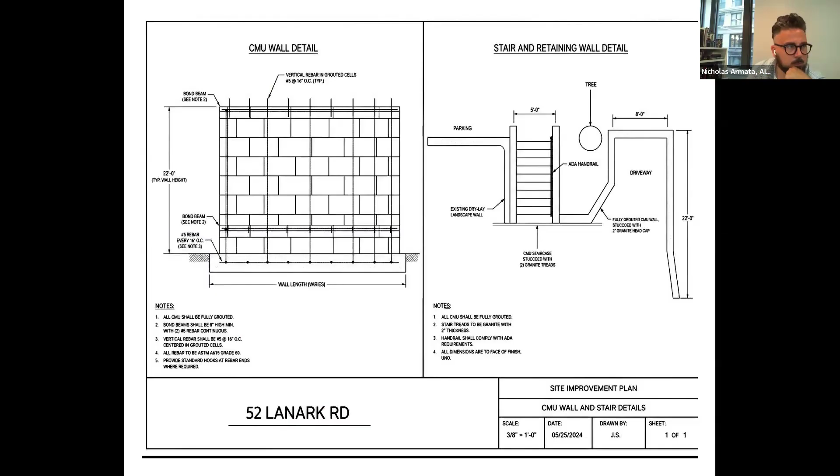Yeah, so there is a brick and CMU retaining wall on the property, and also a set of brick stairs that are failing. The bricks are starting to pull away from the CMU wall, and it looks like there's been a lot of water that's gotten behind it, and it's all kind of falling down. The staircase itself is really starting to kind of settle. I believe the property manager of this property reached out to me, and they simply just kind of want to fully remove the brick and the CMU block behind it, and rebuild that same structure with the same footprint, with new CMU block with the proper drainage behind it. This wall has no weep holes.

So when water gets behind this retaining wall, it's probably getting trapped, getting into the CMU behind the brick, and pushing everything away. So we want to put new drainage behind it, fully redo the stairs, just because they're starting to settle and shift away. They want to try to keep the repair as cost effective as possible, so kind of just reconstruct that CMU block wall, which is going to have steel reinforcement, rebar. The wall is going to be fully grouted, with ties going back into the banking. And it's going to be stuccoed with a granite cap.

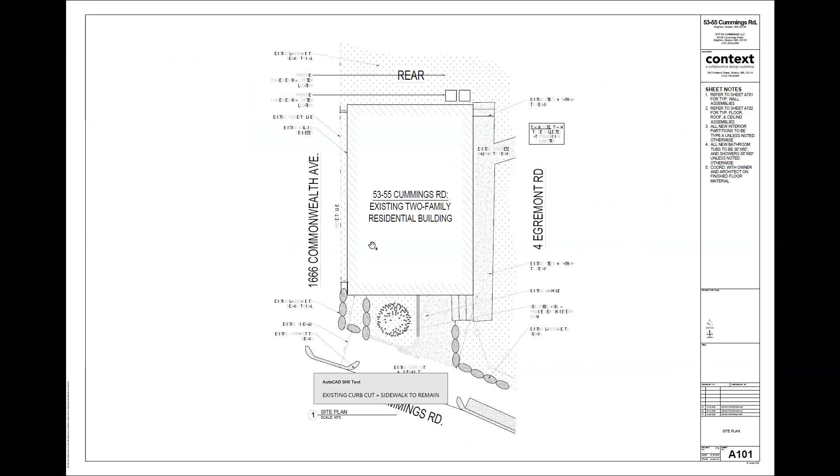Next slide. Also, I should mention the actual entrance to this, you can see it in the upper right here. That's existing, that's always been that way. I believe the way it used to work is that there was a garage door, the front one was a garage door, and the one behind was to sleeping quarters up above. That existing stair looks like it's probably been there since the building was built.

And so now on the first floor, you've got a single 1-bedroom apartment, and then above that, on the second floor, you have 2 beds and 2 baths, and on the top floor you have a living, kitchen, dining with a 3rd bed and a full bath. Next slide.

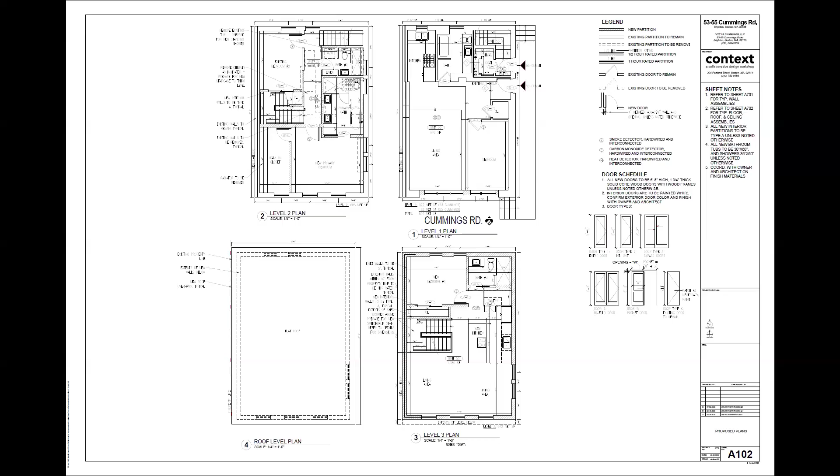So the intent here is that the top floor is going to be lap siding effectively, cement fiber or Acre product - I believe it is the Acre product.

And then the windows would be set on the third floor to match or align with the windows on the second floor, both in the rear where we have existing windows, upper left, lower right where we have the entrance door, and on the lower left you see the elevation that is just 15 inches away from the existing neighbor.

There was a window there, and there was some question about that in the last meeting. The reality is, because it's 15 inches away, we could technically be grandfathered in to leave the existing window, but we think it's safer to put in the appropriate 1 hour wall that you'd have to do with new construction. So we're proposing filling that in, and the exterior expression will be the same lap siding that's on the top building.

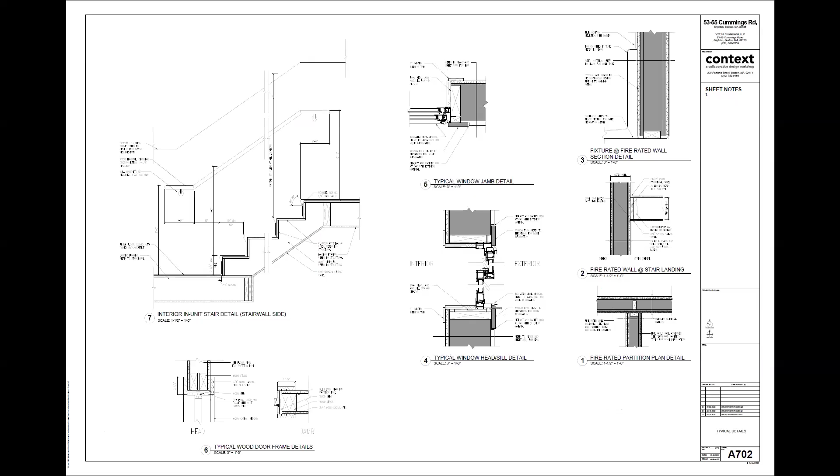I believe there are probably some questions, some things I'm familiar with but I'm kind of stepping past. You can see the existing elevations are at the back of this set as well, in case you want to compare. But I'll open it up for questions and comments.

Let me just chime in here to refresh the commission what they asked for. Commissioners, you had asked last time to change the windows from one solid pane of window to 1/1s. You had requested the addition at the top level be set back on all sides slightly to give some dimension, which Eric has done.

You also had asked for some landscaping in the front, and then to see a sample of the product, which I have here. And I have reviewed it, and I think it's a good, suitable material for an addition onto a historic building.

Being loosely put, but I think then we asked for some changes to happen at the garage, the former garage door area, for these glass windows to fill the space a little bit more. Eric, can you talk about the other changes you made to this door? We talked about this during the desk review.

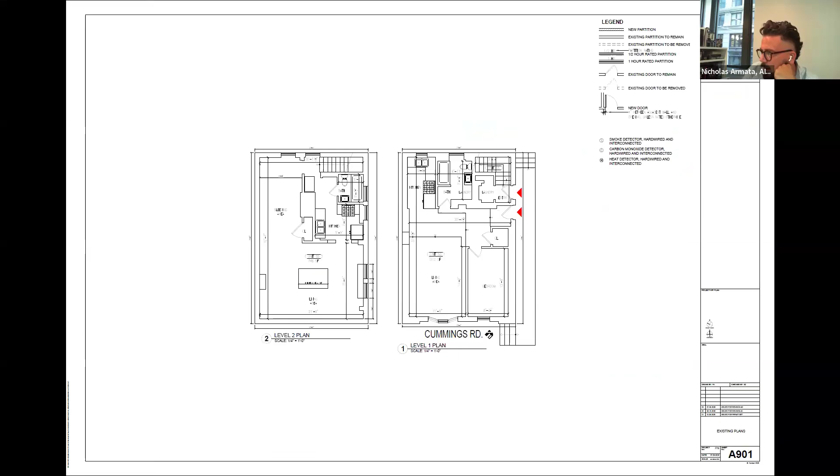Let me just go back - if you could just talk about the changes there so the commission can understand what has changed. I was afraid you were going to test my memory on this because we've gone through so many different iterations. Basically, we had a number of windows - I don't remember what the pattern was, but the request was to make it feel even more like a garage door, so we enlarged the glazing surfaces.

I'm not sure if we redid the pattern to get to this 9 grid and 6 grid on left and right. We have aligned the infill panels, which you see here in a darker gray color, with the joints of the windows. All of that in order to try and make this feel more like the obvious garage door opening that it once was.

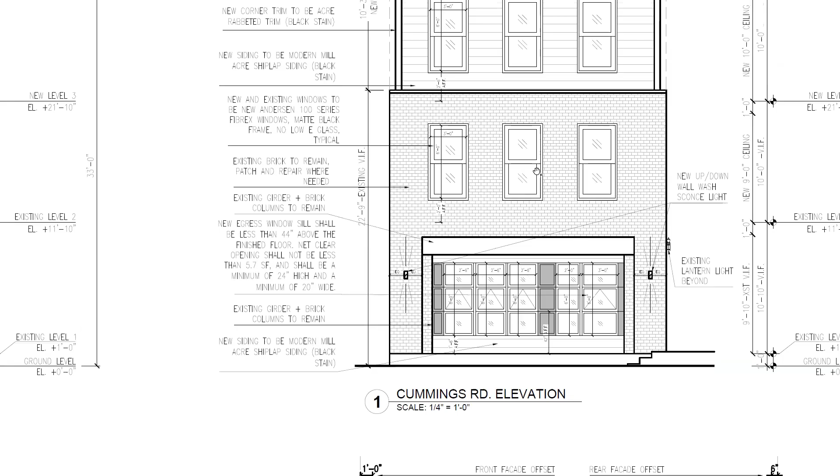The row you see down the middle is operable because this is a living room and a bedroom on the other side of it. And then the other thing you had asked the applicant was to go from a vertical seam on the upper level to a horizontal seam, which he has done, and I think it actually looks really lovely. The other thing that was added are the lights at the front to give it a little bit more depth.

And then in terms of the landscaping in front - Eric, what's the vegetation you're adding here on the front? Do you remember the name of it? Looks like a chokeberry. Yes, good. Great, and I think that was it.

So commissioners, we'll hold it and pass it over to you. If you have any questions, just let Eric know.

Okay, let me begin by saying I think all of the modifications we requested last meeting have been implemented very well, and I do like the end result. Going to turn it over to the rest of the commissioners, but I think we've been pretty thorough on this one so far. Ed, Helen?

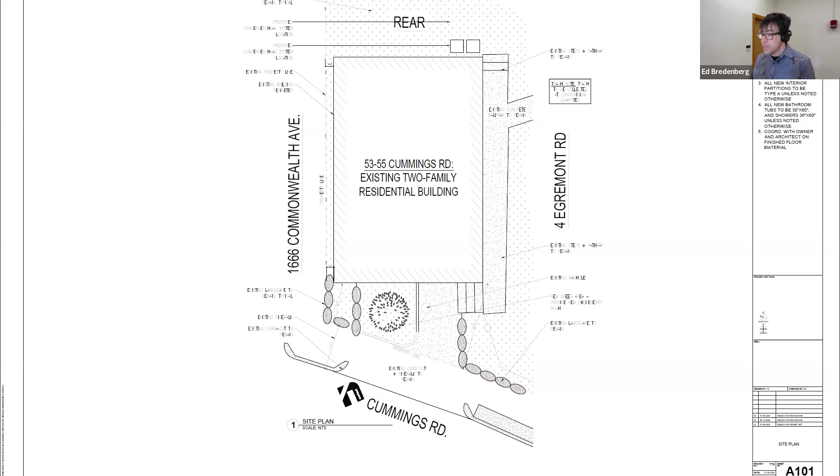Yeah, I agree. All the changes that we had asked for seem to be implemented. Okay, Kirsten, do you have anything to add?

If everyone has, Sharon, I just want to make one comment. I agree with the others that the proponent has followed all of our guidance and done a nice job.

In implementing those ideas, I just want to suggest to the commissioners that if we accept this new material for the third floor, that we are clear in specifying that it's an addition to a historic structure, not even restoring an existing part of the building. It's a new part of the building that we are permitting this new material to be used, because I don't want to be in conflict with other decisions we made.

I still stand by our decision on 19 to 21 Orkney, the Hardie board to clapboard, 19 Orkney address, where we required the natural clapboard material, and that was a full restoration of a historic house. So that's the distinguishing factor to me, that if we do find this appropriate, that is the reason it would be acceptable to use this new material.

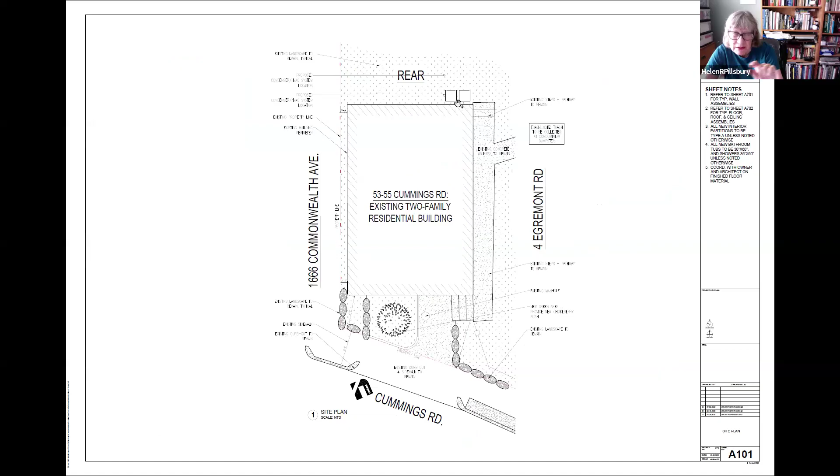And the cap that we're going to introduce, is that sort of like a cap along the top? And what material is that? Painted metal. Okay, that's nice. Thank you.

If we're all ready to go, I'd like to open it up to the public. Could I just ask one question about the cap? Sure. The cap looks like it's wider than the addition, but it's still narrower than the original footprint? Yeah, it's a few inches wider than the third floor, which would make it a few inches narrower than the second floor. Perfect, thank you.

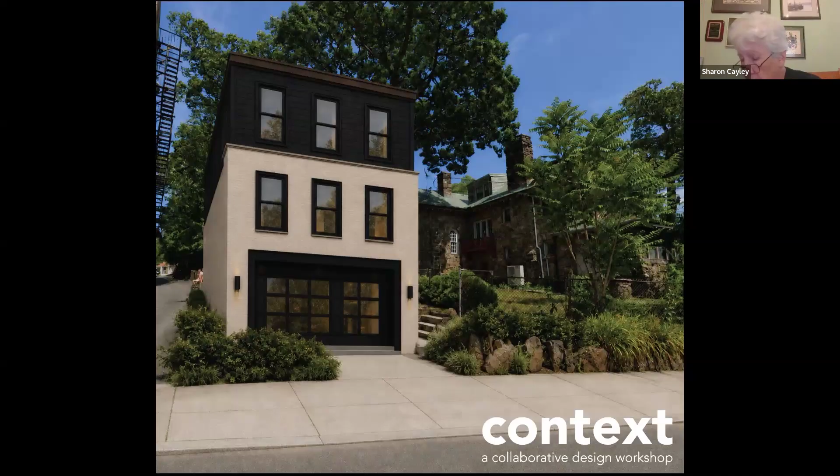So I'll entertain a nomination. I'd like to put forward a motion to approve it as submitted, with the construction material and construction plan submitted to staff. I'll second it. All in favor? Aye. Aye. All right, perfect, that is approved. Thank you very much.

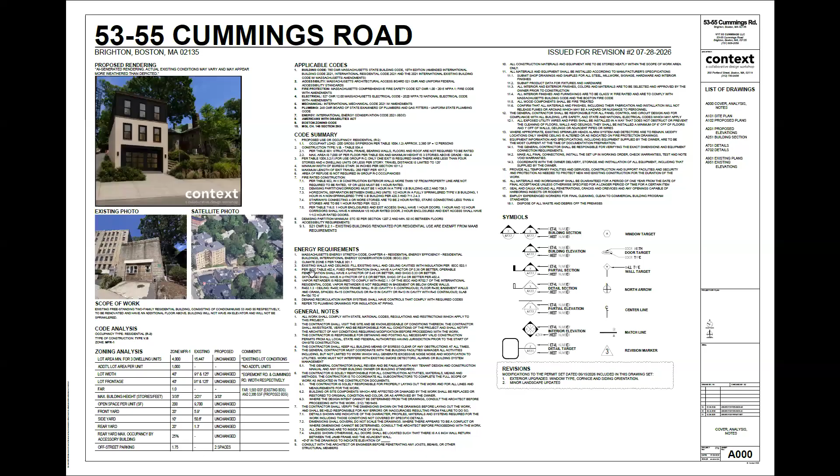Are we ready to move on to application 27.0092? That's 1954 Commonwealth Avenue. This is a design review.

Is there anything that we haven't seen already? Sharon, we're going to allow the applicant to present. Okay, so we have Mark and Susan. For whatever reason, Susan's on my computer with me. We're right here, perfect. Mark, do you want control of the presentation, or do you want me to flip through for you? I'll do it if you don't mind. Sure, let me just make you co-host.

Why don't I see the... is this? That's a preview though. I'm gonna just go through quickly the slides that were presented, and then we can look at the 3D too. I'm gonna have Susan start with the landscape first.

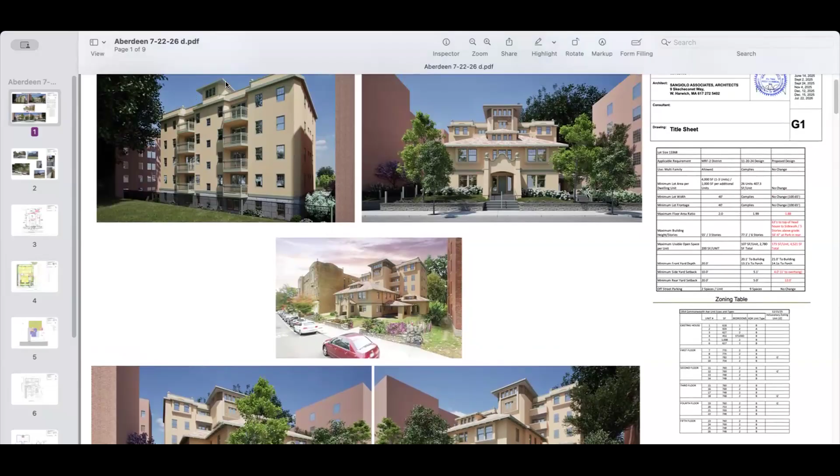As for the architecture, I think we had a fairly extensive review last time when we modified things, and everyone was pretty happy. We made some modifications during the meeting, including pushing the tower back, putting a nice roof on the tower, flattening the roof at the rear, and doing the balconies solid. Some of the things we organized since the last meeting, the comments we organized - I'm going to go to the 3D, I think that'll help better.

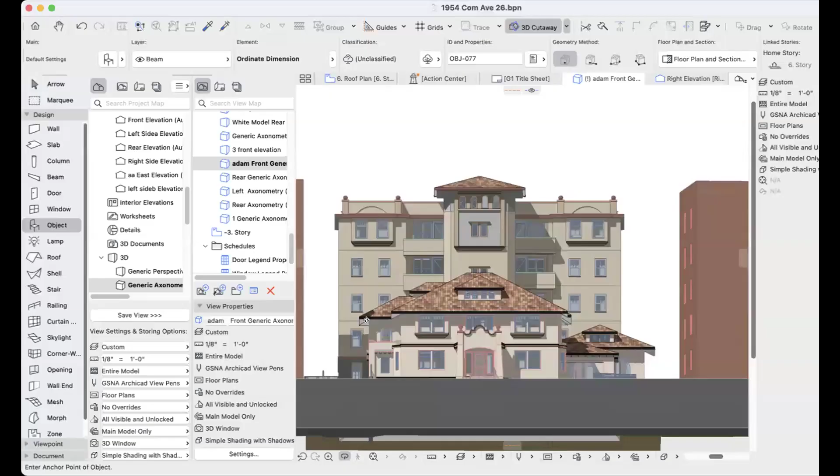So everyone can see this now. We organized the windows and doors to the balconies, so they're a little more uniform.

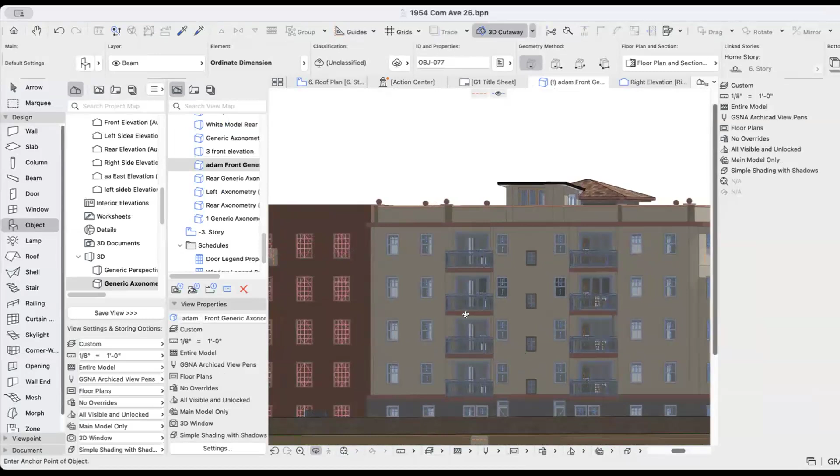One thing I'm going to push back on a bit - I'm willing to do the flat corners on the front of the building, and perhaps the solid railings, but on the rear I really want to do the chamfered corners. It's sandwiched between these two brick buildings, and there's an implied force on any structure you build, and this has kind of an implication being between these two buildings. I think it'll create a nice positive effect. In any architecture you want some delight - you don't want everything monotone. This solves that problem and adds a little delight.

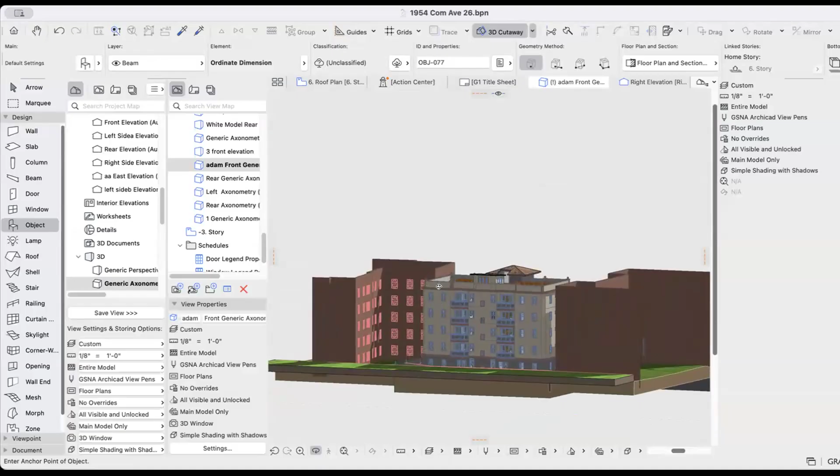On top of the roof, I'd like to keep the balls. I think they add something to the building and create a nice little delight, and it matches the two balls on the front of the existing house. Those are really the only changes we've made.

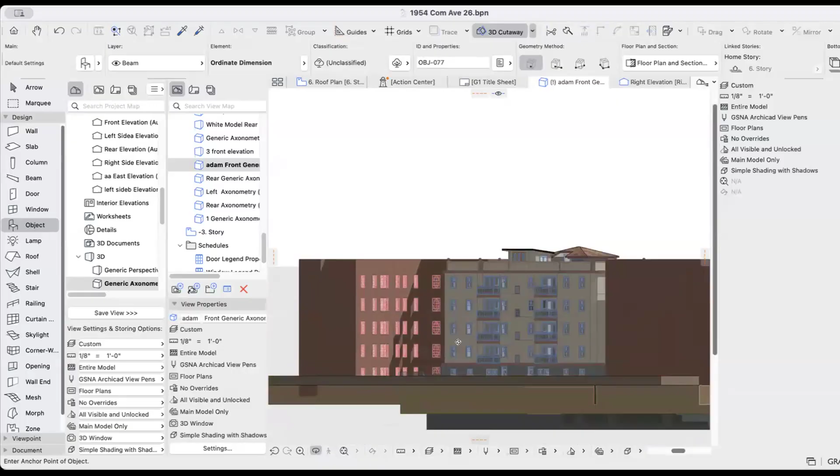Also, I don't want to do the solid rails on the rear - I want metal rails. This building is going to be a condominium, so it's not going to be a case of apartments with people trashing their balconies. People are more inclined to take care when it's owner-occupied. The metal is a mission style railing - many mission style buildings had metal rails, and since it's owner occupied, people will take care of their balconies.

Getting into the color of the building, I'm going to go back to the other presentation. We want to do the two - I know you're not regulating color, but what we're thinking is red tile roofs, some red tile on the face of the tower, cream colored stucco, and a historic green color for the metalwork - the windows, the fascia on the overhangs, and the railings. That's basically it.

Mark, will you talk about the color of the proposed building compared to the existing building? Is there going to be a gradient change or difference? No, they'll both be the same color, same color scheme.

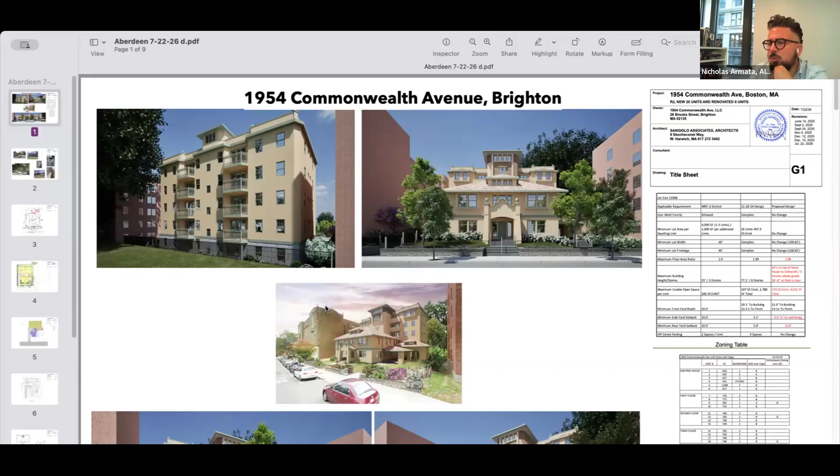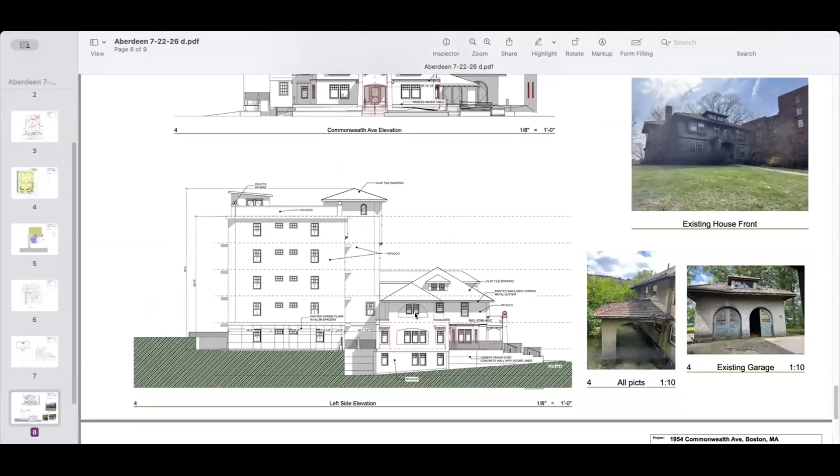Mark, explain to the commissioners where the HVAC is, just to refresh your memory. Sure. Most of the HVAC is on the roof of the addition, behind the parapet. Also on the roof there are some green areas that are accessible. And then there's a couple of spots not visible from the street where we're hiding the HVAC for the existing house. Let me see if I can find it.

One is behind this area - there's like a little deck courtyard back here, one's there. One's behind the porte cochere. And that's about it really - they're hidden from view. Good.

One last thing, Mark, and then I'll let the commission discuss this. The doors to the garage - it was a little unclear in your submittal whether they're being kept, or if it was a rendering error. Can you explain that to the commission?

Yeah, the doors to the garage, we're going to rebuild in kind to the same geometry that they are - they're not in great shape. Okay, it was unclear, so we just wanted clarification.

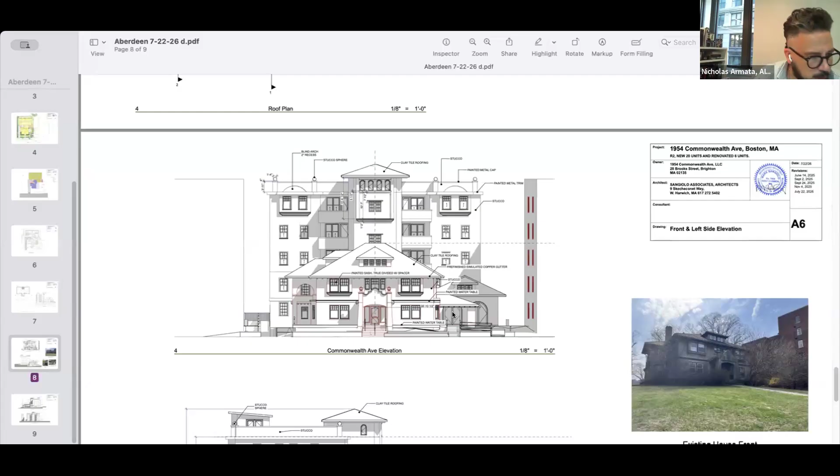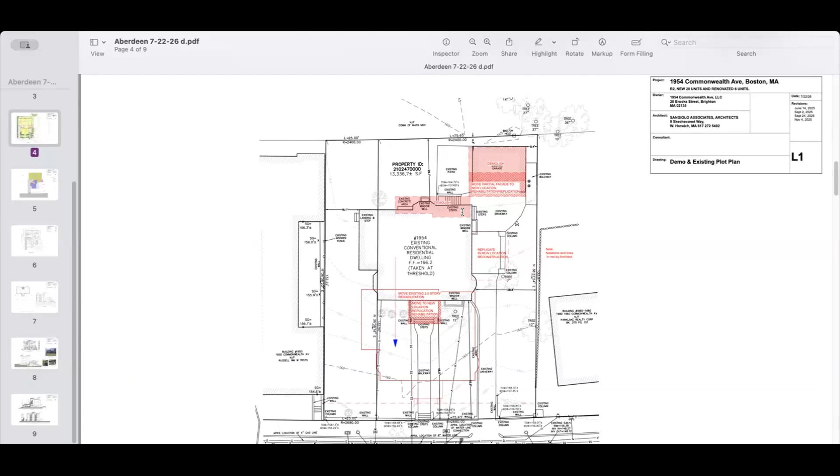Mark, are you proposing to demolish the chimney on the existing structure? Yes, we are. The back portion of the building here we're going to demolish, and I think part of that is the chimney. There's kind of a lot going on back there - there's a bay and a balcony, and we really can't incorporate it into the design. We have to have a clean surface to tie into.

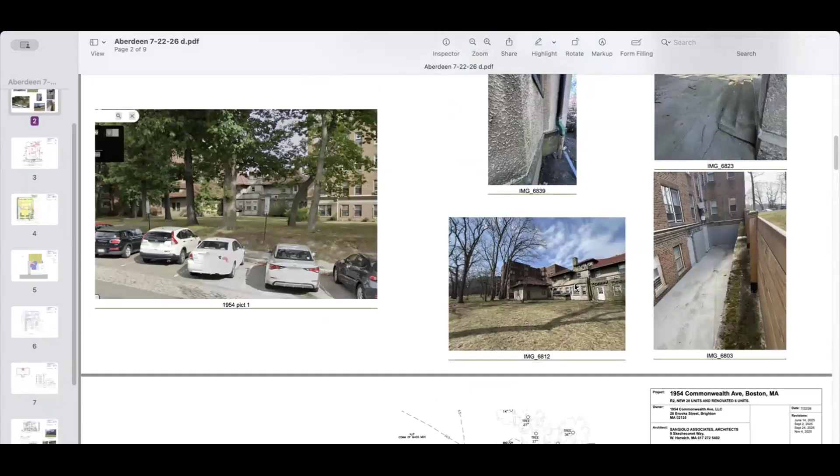And that was allowed in the special permit and approval given earlier. The original design for the addition? Yes, the removal of that wall and the chimney were both approved. Here's the rear of the building - it's virtually impossible to connect to this, there's so much going on, and it would be hidden anyway. The new building would be completely obscuring it.

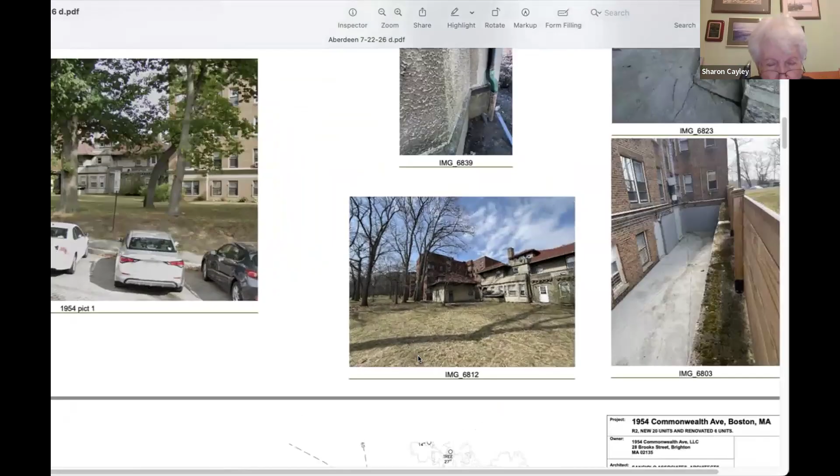We focus on chimneys because we had an issue on the other side of Comm Ave with a very distinctive chimney that had a crown effect on it. Can you blow up that image, number 6812? It almost seems like a utility chimney. Yeah, it does look like it doesn't have any distinctive features. All right, thank you, that answers my question.

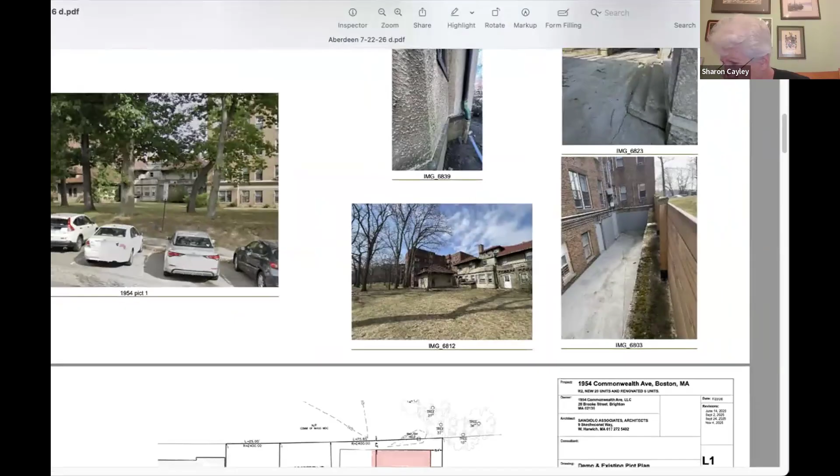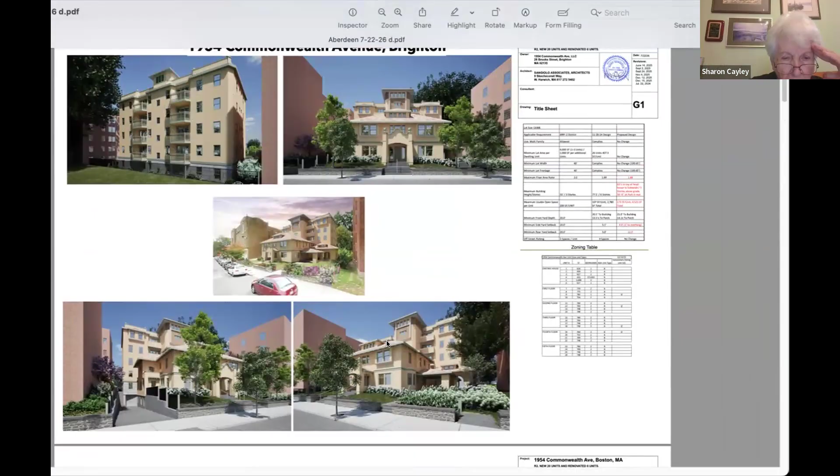I did have one question, and I know it's come up before. I know that the handicap ramp has to be there and the space is constrained, but is there any way to stretch it or make it less of a 3 or 4 right angles? Or is this the best that can be done with the space allowed?

What we tried to do was, this will be the main entrance for the new tower, so we wanted to coordinate that handicap accessibility with the main walkway that gets you to the back. The only way we could really do it is to do these ramps between the planting beds. Otherwise, we wouldn't really be able to have the walkway with the steps that most people will be using.

Yeah, all right, thank you. And I did check with our architectural access board on this. It is the preference of the board to have the ADA compliant entrance be the same as the main entrance. Okay, I was comparing it to other ramps that I've seen, and I know that the pitch is critically important, but okay.

Are we ready to move on, is that the end of the presentation? Yes, I think so. Could I ask for just a clarification on the ramp? So the reason why the ramp is there is because you wanted to also have the stairs. So is it a matter of you may have the ramp or you could have the stairs and you wanted to have the stairs, or?

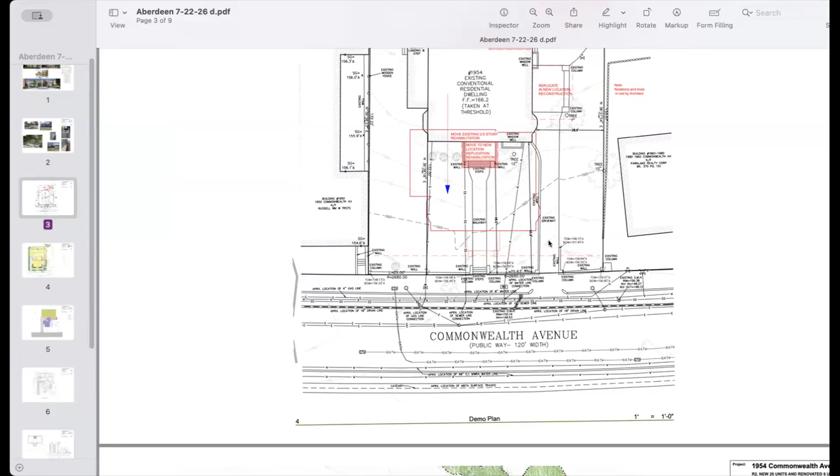So it was 10% back to, that's not even, you don't even show where the garage is. The garage is further back. Right, so for accessibility, it's pretty steep.

Commissioners, for what it's worth, I think that's adequate. I think it sounds like it's erring on the side of caution and keeping our folks with mobility issues in mind. It's probably right there on that cusp of the 8% grade, so it's probably something that just needs to happen. It doesn't look the best, but if it means people with disabilities can get into the property, then that's worth it. And landscaping helps a great deal.

I would just like to suggest that in the landscaping plan, the shrubbery there be something that would retain some greenery. Yes, actually all three of those planting beds, I believe one's an azalea, they are evergreen, and they stay at a height under 4 feet. Right, and they also don't want to be too tall. That's right, retain greenery but not too much height.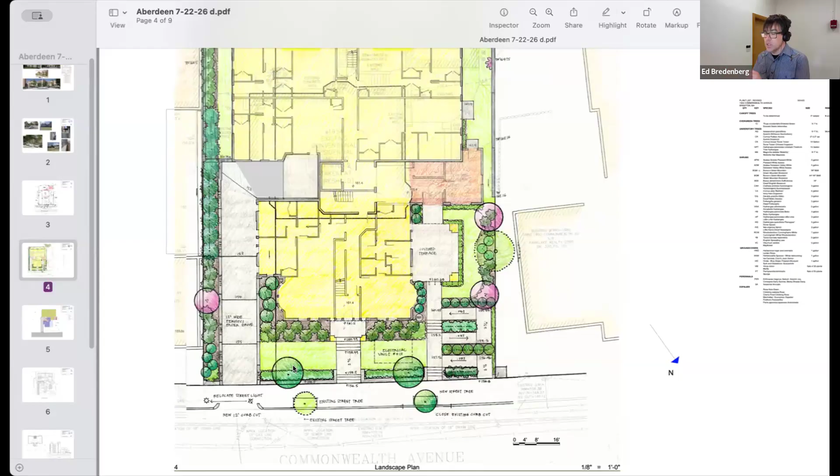Thank you. And we'll be able to keep as much of the stone wall in front as possible? We will, we're still, if you look at what's proposed for the utilities, there's a lot of utilities and vaults that have gone in there. So we will do our best to try and keep it. If we can't keep it, we will be very diligent with our specifications to try and match what's there. But we'll do our best.

The rendering that I saw on the portal sort of showed some other kind of stone. It didn't look like it was retaining the existing wall. I think that's an important feature of the property, that's important to retain, the round stone. Rebuild it if necessary, but retain those stones and retain that wall.

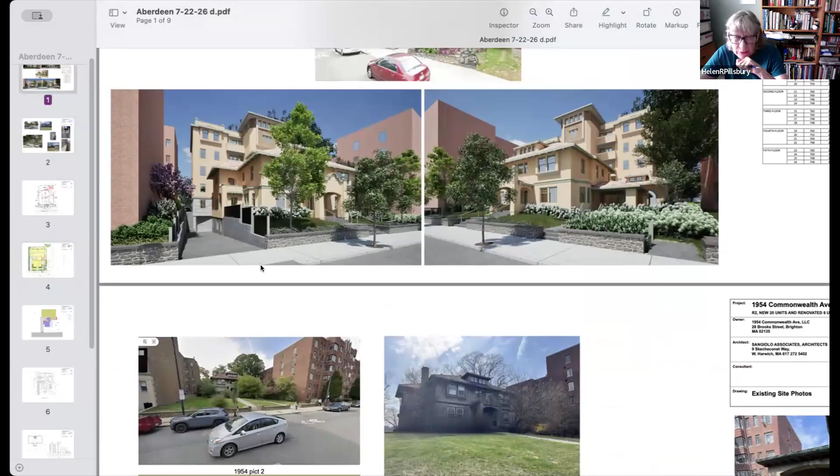Yes, and that's what we have available in the rendering. It would definitely be the round stone with varied sizes and colors, and the joints would be similar size, similar color, similar depth. They're actually not hard walls to build. The round walls, of all the stone walls, those are some of the easiest. The hard walls are the mix of round and flats.

But I think we want to clarify that we're looking at retaining the stones and the wall that are there, correct, not getting new stones that are similar, but actually maintaining and rebuilding if necessary.

If something needs to be deconstructed as part of the construction process, then reconstructed. I know there are some places where there's some stones missing. There may be some maintenance or reconstruction that needs to be done. I know there's some cracks on the flat cap surface, but I think the wall itself is an important characteristic that we will save. We will save the stone. There's stones that have to be removed for utilities and then reinstalled. Thank you. Okay.

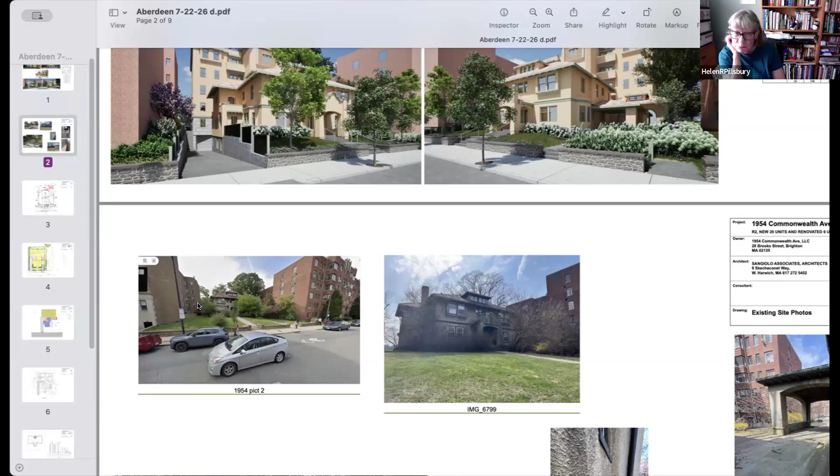Actually, Sharon, I'd like to go over a couple questions about the original house, because maintaining, preserving, and restoring the original house is of great concern to this commission. I just wanted to check on the material of the windows.

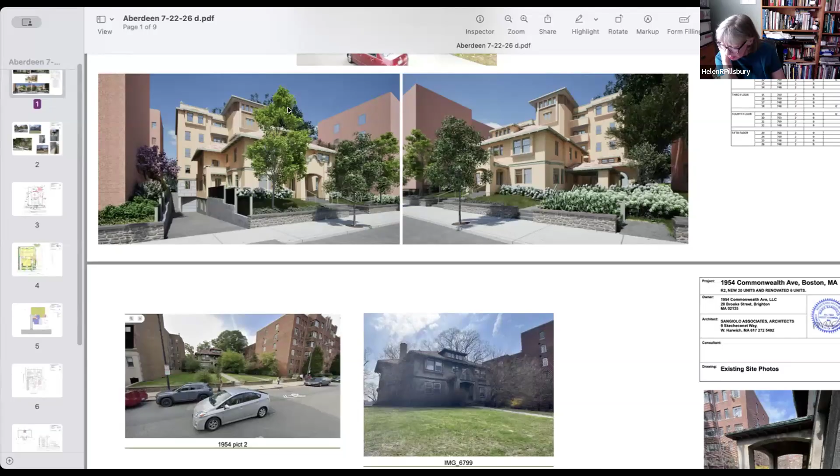Well, the windows are going to be an aluminum clad or fiberglass clad factory painted window. There's no restriction against fiberglass, Helen. So they'll look like a painted window.

And the stucco, we're going to have to remove the stucco from this building. It's got a lot of degradation areas from moisture and water damage. But we're going to stucco the building back. The whole building will be stucco. We're going to keep the band, and we're going to have a painted water table, probably in wood.

We'd like to do a pre-finished simulated copper gutter. I wanted to ask about that — what material is that, that's called simulated copper? It would be painted aluminum, but it would be the color of patinaed copper.

Nick, is that acceptable? The guideline is that original or later contributing roofing materials, elements, features, details, and ornamentation, including gutters, downspouts, and flashing, shall be retained. So whatever the existing material is, they have to stay that material. Okay, so on the existing house we'll have copper gutters, copper downspouts, and we are going to do clay tile roofing, same style that's there.

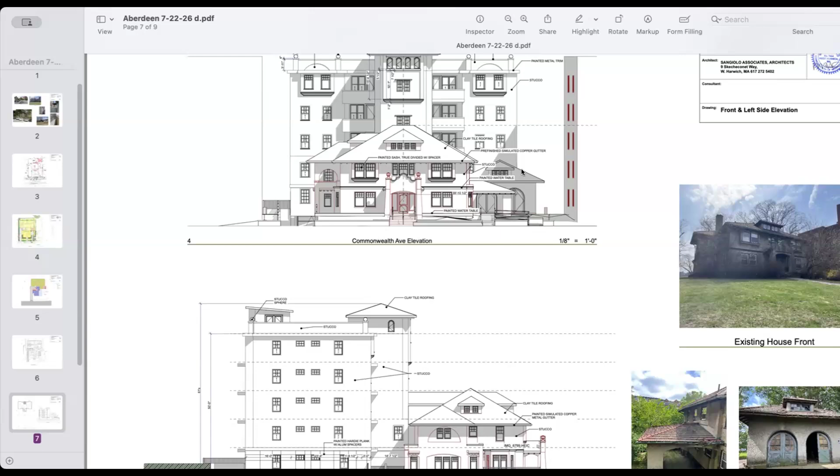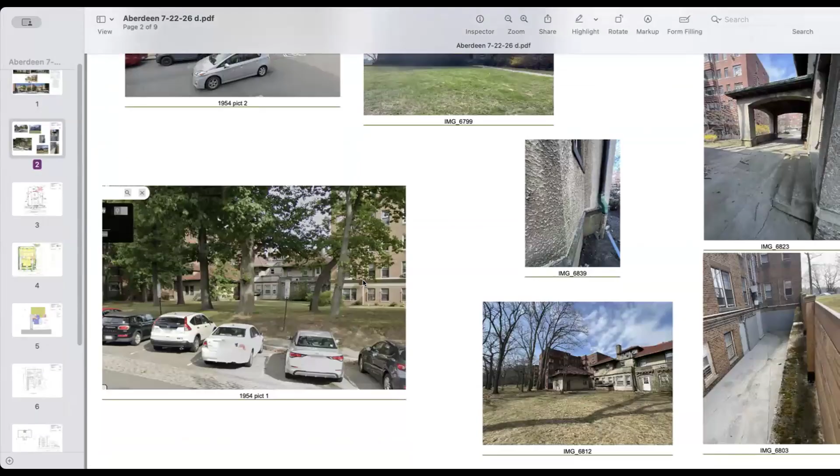And the original front door — will that just be restored and still be part of the house? I'm not even sure, it's wood and glass now. But will the original door be retained and restored? If that's something the commission feels is important, we can try to do that. It becomes difficult because some of these old doors don't seal as well.

But what do you think, Nick? The guidelines say doors shall be retained when possible, but if they have to be replaced, they shall be replaced in kind — meaning it would need to be a wooden door. So if it's a wooden door, it'll have the same glass and wood style.

You can't see it well now because it's like an apartment — there's a little vestibule with boxes there now, so you can't see the door clearly when you enter.

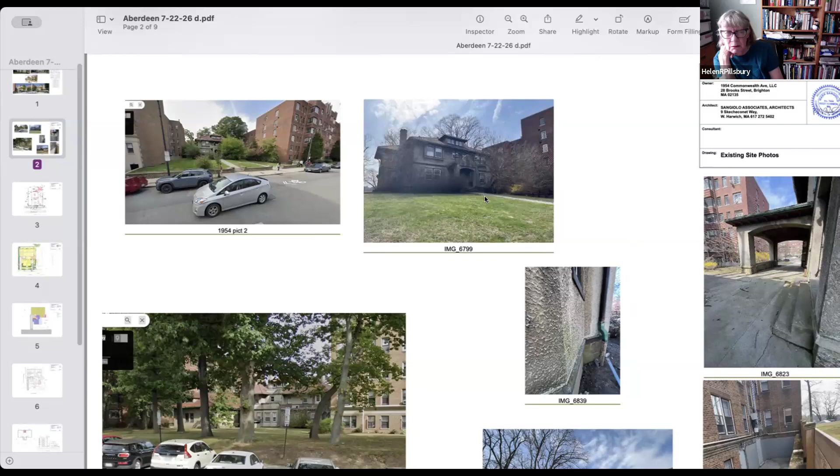The other thing I want to ask about is the front area — there's a railing there, and I wanted to ask about the material and color, and whether Nick thinks the style is appropriate. That's the handrail at the step out to the street. I doubt that's original. No, it's not original, it's not there now, it's part of the new plan. But I'm asking if the style and material they're proposing is appropriate.

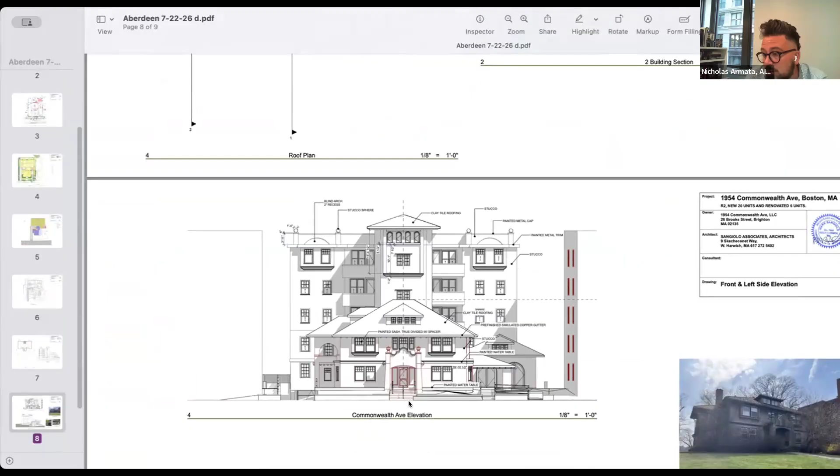Is it on the side or in the center? It's right in the front, going on the steps. It looks like there's two — one on the side and one in the center. Farther up it's on the side, and the second set of steps lower down has changed to be on the side. You can see it more clearly on one of the renderings that has color.

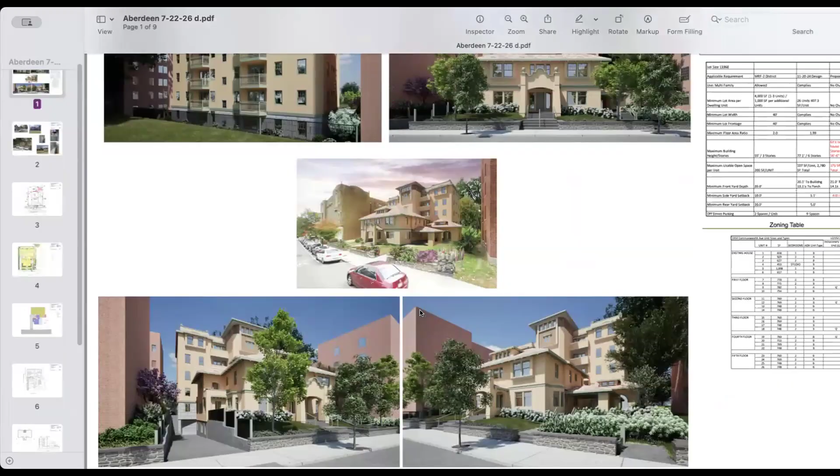That's the bank of steps at the street. It's very utilitarian looking, but on the other hand, it shouldn't be something too ornate. I just want to check if this is appropriate color wise.

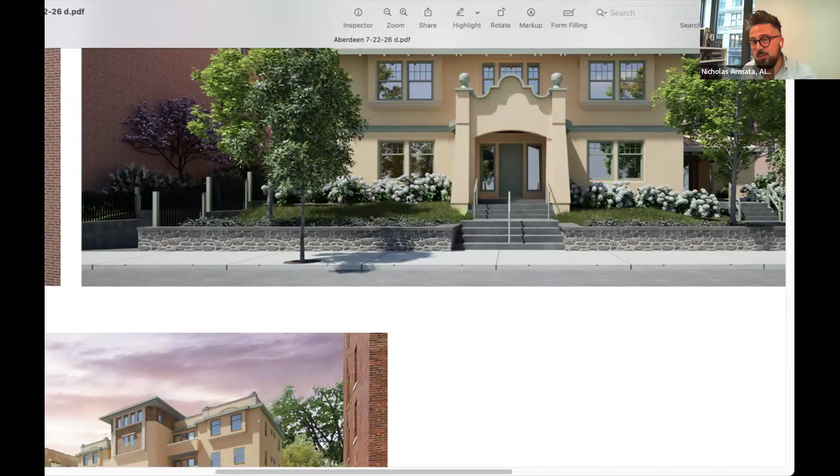It's best practice for accessibility things such as handrails to just be a simple black metal rail. We don't want it to mimic a historic condition because it would be a false sense of history. So these are actually perfect. The renderings show they're gray, but I would recommend that they're black. They seem like a black metal rail with integrated color, and that's how we get around the color thing. It's just a simple black metal rail.

And my last thing about the original house, I do want to suggest the idea of possibly making the original house a slightly lighter shade than to offset it from the new building. I mean, I think it'll be obvious that it's a new building.

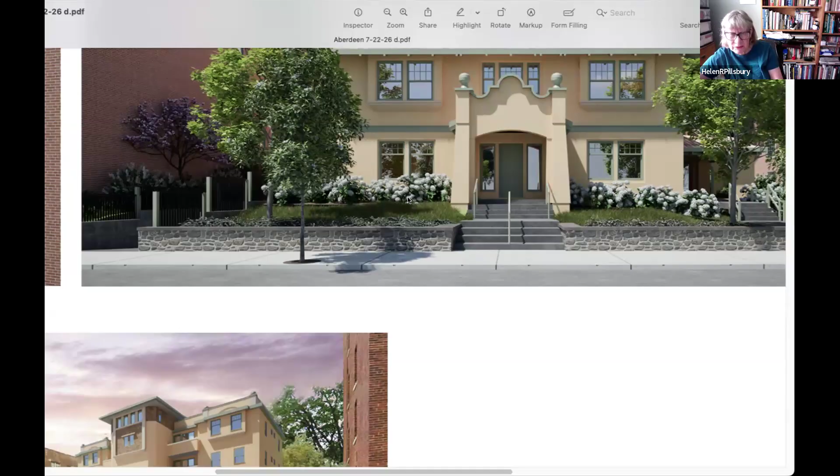There's that important factor in preservation. If there's a new structure, it shouldn't try to completely mimic the old building. It needs to be able to distinguish that it is new. I think the fact that it's a 4 or 5 story building makes it obvious it is a new building, but to me, it almost kind of blends in, and it's hard to tell where the old building stops and the new building starts. I would like to hear your observation, Helen, on a differentiation.

I don't entirely agree with that. The difference in paint color, I think they will weather differently over time because you've got new material and old material, and they display better. I wouldn't push that point. What I would say is that we don't regulate the shade, but we can recommend.

And just for the record, I like the decorative balls on the new addition. They do repeat that rather charming feature of the older home.

I do want to say a couple of things because I live in a very old place. Old materials don't always behave the way we want them to. In moving the house forward, I expect you're going to have a lot of cracks in your stucco.

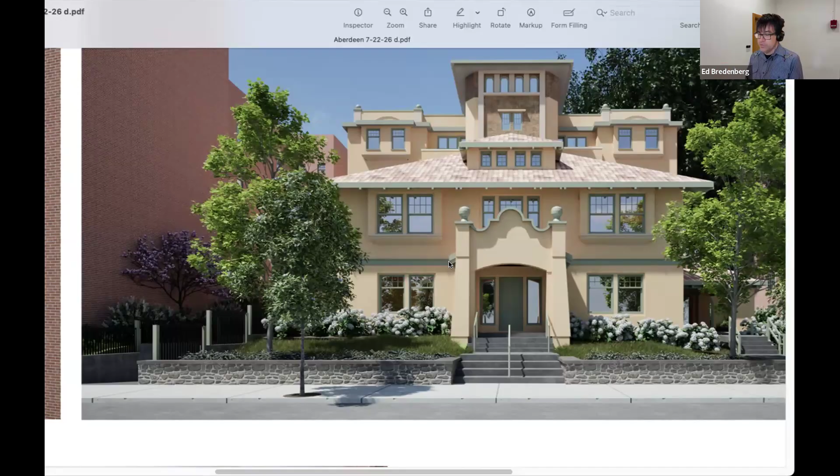I can see your point, Ed.

Is the structure just too ornate? In the picture we're looking at right now, you can't really tell what's what. I don't know, Ed. I think we managed to deal with all of the stucco and gingerbread in the last two meetings on this, so I would respectfully disagree with your observation.

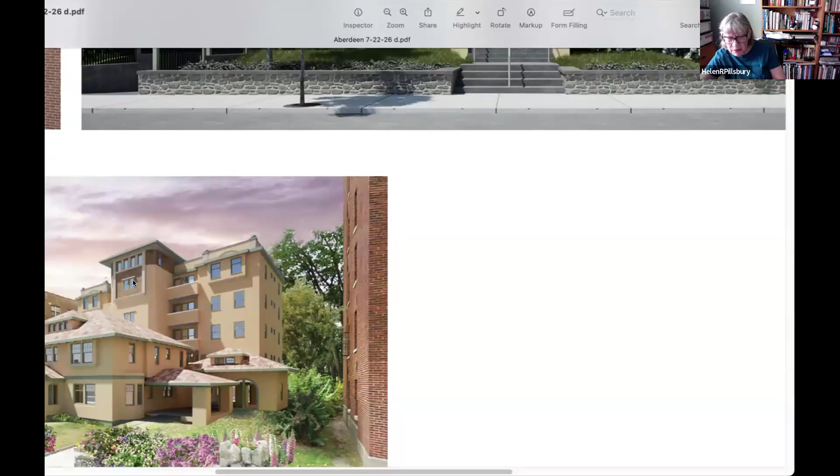Can I ask a question about the area where the tower sits? Maybe this was there before and I just didn't notice, but there's a rectangular, almost square panel starting at those four small windows at the top, with a darker frame around it. What material is that? Those are ceramic tile, the same color as the roof, so it pulls from the roof material and puts it in a panel on the tower.

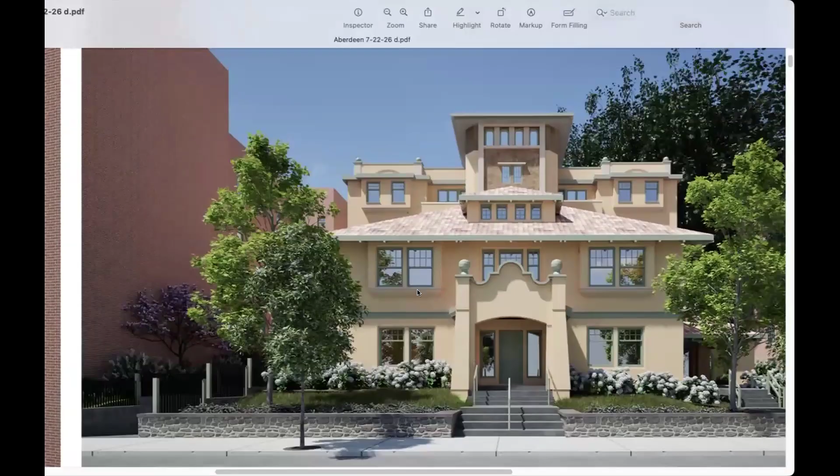It's kind of a fun element—buildings should have a little fun, a little detail, a little delight. Well, that's what we were arguing with Mark before, right? He added that detail.

I don't want to spend time on that at the expense of everything else, because there's a great deal that's gone into this project. Unless that's a hill you're going to die on, Mark, I think I'd remove that.

Is that added since our last meeting? Is that a new element? The details weren't fleshed out at that point. I'm not sure about it. I was talking about making the new building a different color, slightly darker shade, and at the roof line of the original house, that somewhat distinguishes and offsets the original house by having that bit of a darker panel.

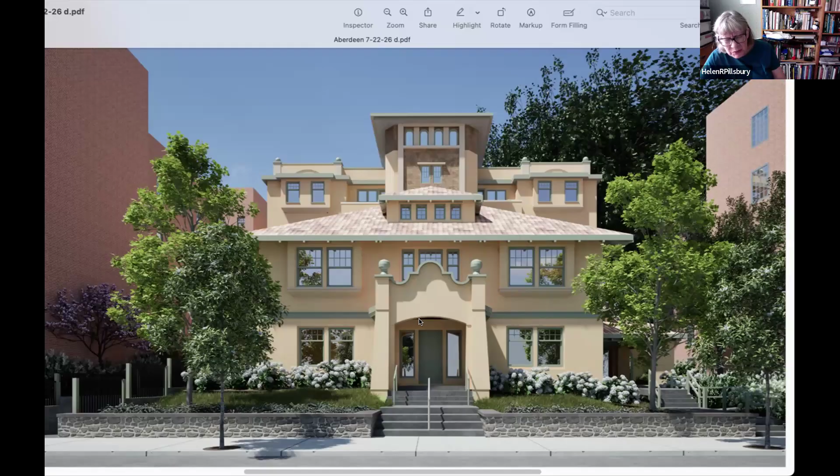It's hard to tell at every angle—it won't look the same. We're seeing it flat on, which is not how it will always look to passersby. So I'm really interested in what other commissioners think about that. Maybe that does give—not a hill I'm gonna die on.

I mean, it could be stucco. Frankly it's more complicated for me to detail it and pick the material, but it would make my life easier. I like it, but whatever. Well, I like it too, but let's make your life easier, Mark, and just stucco that part. Okay.

Have all of the commissioners voiced their views? I haven't heard from you, Kirsten. You still with us? I think Kirsten got kicked out and came back in, but she's no longer a co-host, so I need to make her a co-host so she can unmute herself. Got it. Yeah, and she's muted. Yep, there we go. She's all set. Okay, thanks.

Yeah, I agree. I think there may be a darker color, but I don't think the ceramic tile treatment is necessarily needed. I think the balls and some of the other details are fine. Overall, though, we're going back and forth on these details—I think it's really much better than previously, so I can't say definitively on any of those details.

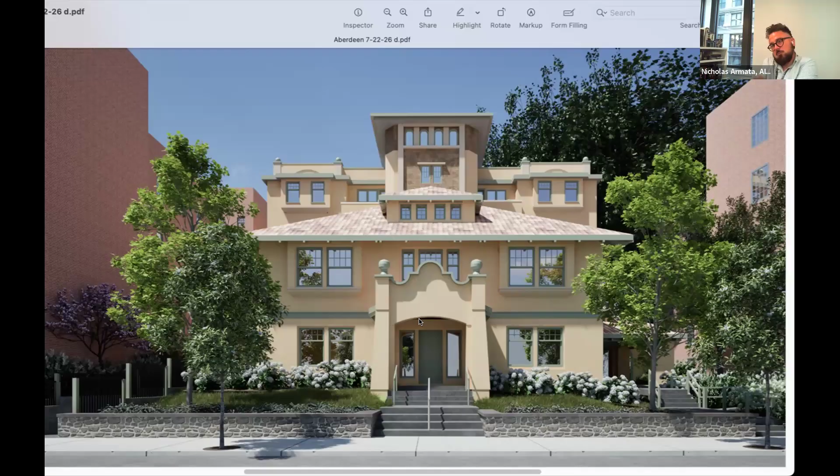My name is Ines. I am an abutter, and I'm also a member of the Chestnut Hill Reservoir Conservancy. We advocate for the state parkland on the rear side of this building, and I've been following this since the previous owners. It's been quite a ride, so it's nice to see it's almost ready to finish up. I have some questions about the property line—if we can look at slide 1, there's a drawing, a rendering of the rear of the property.

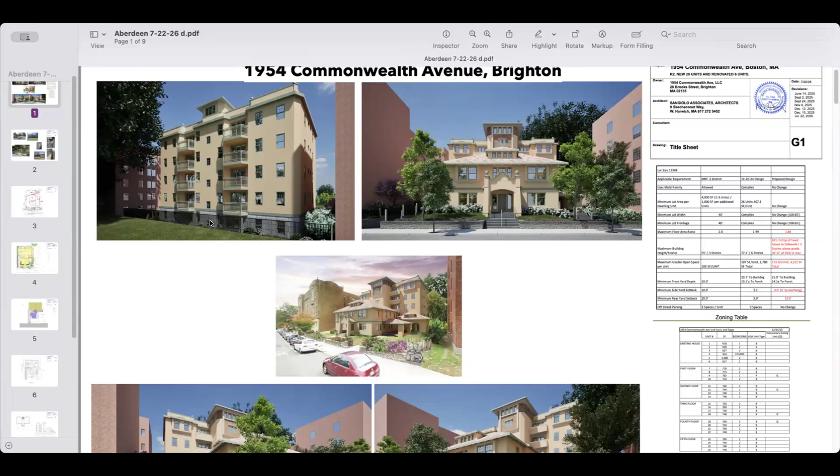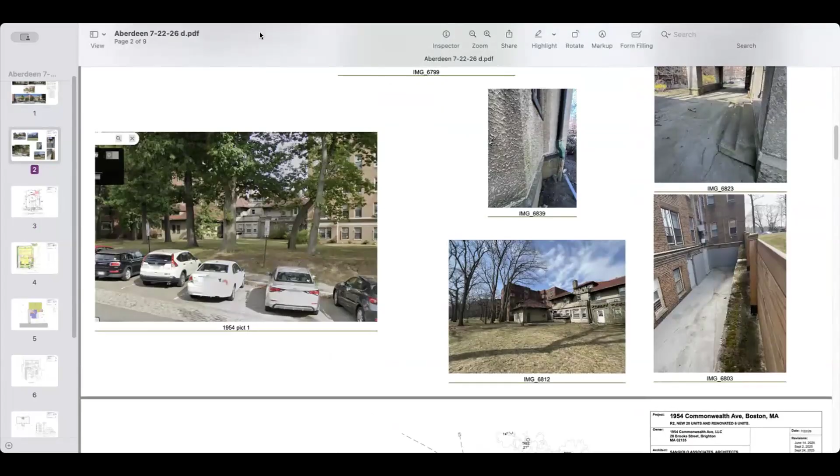If you could scroll down a few more drawings, go up a little to the right, 6803. That's on the left property line. So you're going to have fencing right along there on your property line, to the left of our property - this is a photo along your left property line. So you're gonna have a fencing there, and then the driveway is gonna be right there.

Let me see what's going on here. I'll let Susan comment on this. It's actually an evergreen hedge there along the center portion of the sunken utility court, and there is a fence there also.

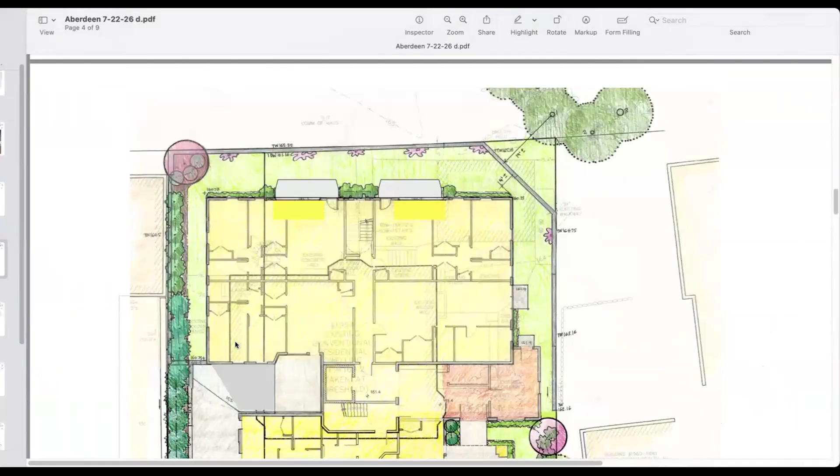So is there going to be remaining access for the residents of that building to the left to walk along the right side of their property? No, I don't think there is now. If you go back to your photos - right there, we have the retaining wall, that's their retaining wall, and that's their wooden fence, and to the right there's a whole - it's all grass. You can see it in photo 6799 a little bit higher.

Okay, just so we're clear, are you saying that when we look at this photo 6803, they walk on the right-hand side of that wall? Well, yeah, they're not jumping down there and climbing back up, they're going along that wooden fence way. No, that's the property that belongs to 1954. Right, so the question is, that wooden fencing is 1954? Yeah, that's right on the property line, I think.

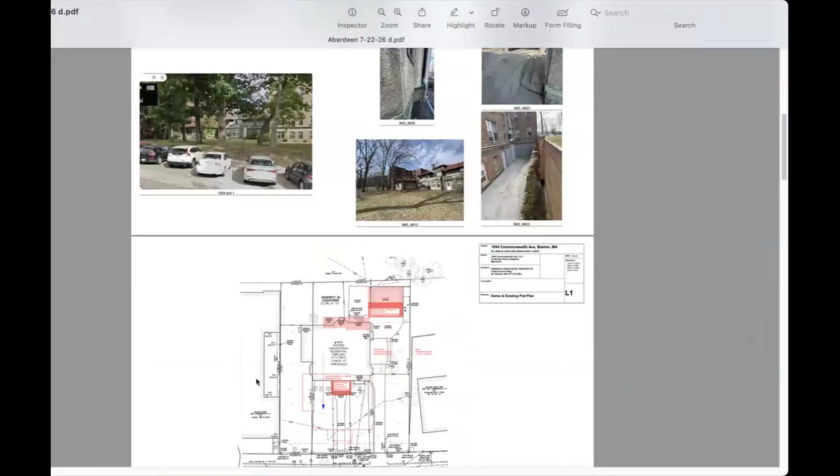Let me make sure I'm speaking correctly. The other thing is that we have a retaining wall so that we can get down to the garage area, so there won't be access between those two walled areas. Here's the survey, the existing condition survey with some markups, but you can see the property line is right along the brick. So people lose access from going up to the back. Let me show her our site plan, because there's the wall at the front of the property, and then our retaining wall steps down because we're going below the building for parking.

Yeah, but she's saying - I understand you need a retaining wall, and my question is, you're just cutting off access for people to walk alongside that building? Yes. And you're putting a fence in the back, so there's no access at all. Correct. And on the right side also, you're gonna have fencing, so you're basically enclosing your whole property.

The right side, the wall steps down and we don't have a fence in this area, so we don't really have a fence. There is a stone wall there. I would assume that's part of the property at 1960. Yes, it is, right here. So their stone wall will remain, you're not going to affect that. Their stone wall will remain, correct.

Okay, I just want to point out, you're going right to the property line and cutting off what's traditionally been an accessible area for people, unlike all the other properties. The other thing - all right, so if we can go to Street View, Google Street View.

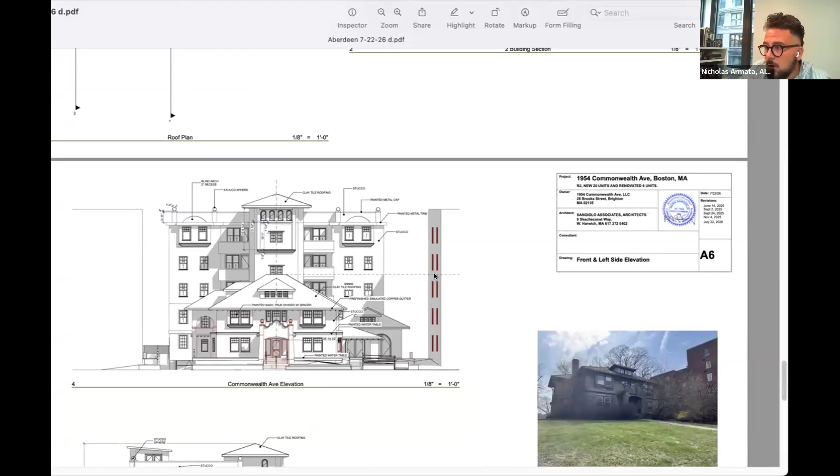Do you have to get out of the screen? Do I have to stop? I think you have to. No, I can take it over. Okay, I think you're referring to this, Ines.

Yeah, that's part of the neighbors, and they take good care of that. They put flowers in there, and there's a matching planter on the other end of their property at 1980. So I just want to make sure that's not going to be affected. You're not going to knock that down? No.

This is actually a nice view of that stone wall in the front that I never really thought about. I pass it 100 times, but when I listen to people talking about it, it is a beautiful stone wall, and I see it mirrored in the neighborhood in the Aberdeen area, that kind of stone wall. So I hope it retains.

And the only other thing is, you made a comment, Susan, about an outdoor space on the right side of the building. And I think just as an abutter, the acoustics are really loud. So if you're gonna have people right up against the brick wall, and they're drawing it, it shows more space. That'll be tough acoustics.

Where are we, the porte cochere, is that what? I think we're in an earlier meeting and asked about the windows from your building and how it related to this building. Mark, do you have that? Where you showed, are you talking about this space here?

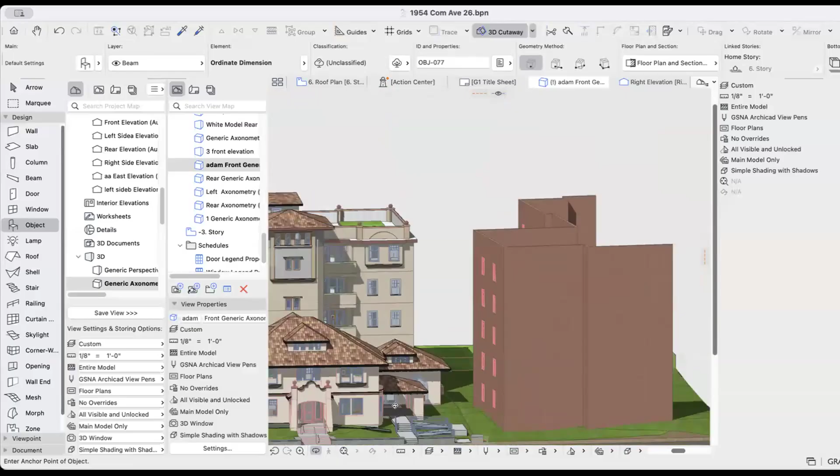I just want to point out, and if you could do any acoustic softening, I guess that would be a good solution. Sure, we can do an acoustic soffit on the porte cochere. Yeah, that'd be great. That might help a little bit, at least the echoing and when people are in that space. And I think that's it.

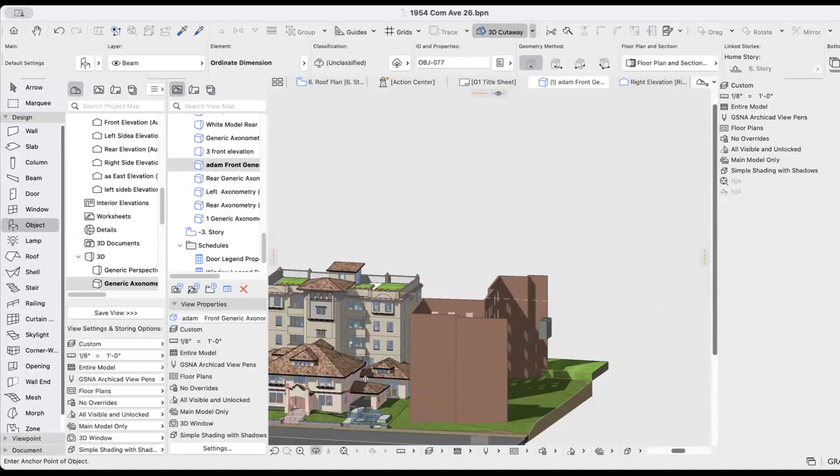I know you probably don't know, or if anybody has any idea of a timeline, how long the construction would last once it starts. I'm guessing there's a couple of puzzle pieces to move around. Yeah, I'm guessing it's going to be 18 months. Okay, I won't hold you to it. I know there's a lot of stuff that has to go in. And that's it. Thank you for your time.

I'll go back on mute. Thank you. Thank you. Thank you, Ines.

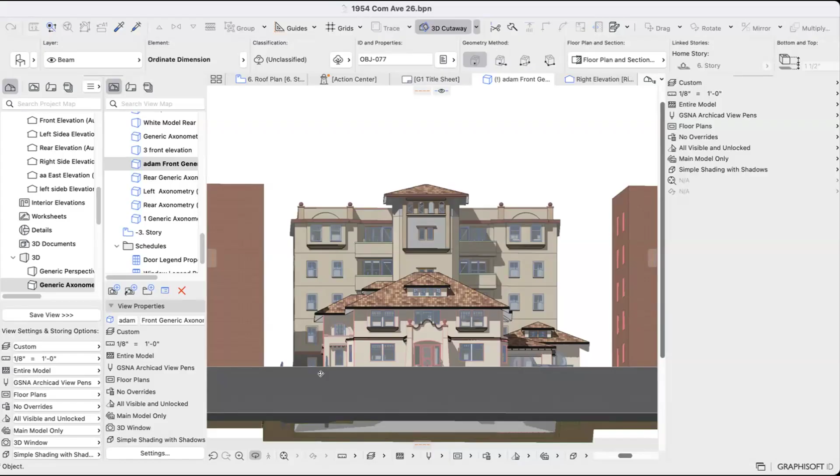Thank you. Just one second. I'm so sorry, I had to turn off the air conditioner because it was too loud right next to me. Ines was afforded quite a bit of time, so I hope I will get the same treatment, although I won't abuse it. Could I see the landscaping plan, please? Sure, yeah.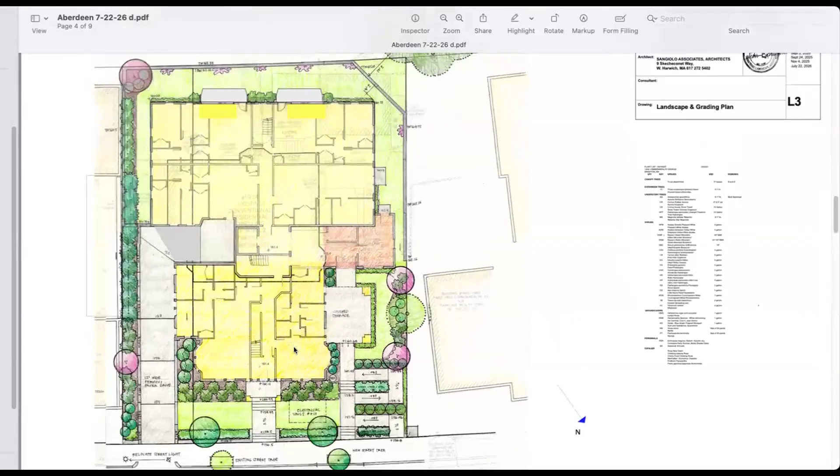I'm just curious, what is the distance from the front elevation of the house that will be moved and the sidewalk? How much depth will the front lawn have? That's 20 feet. The front yard's 20 feet.

In this particular drawing, I don't know if it was intentional, but it doesn't really clearly state that there would be a stone wall in the front. It shows some kind of hedge that is wider than what might be the stone wall, which is depicted as a very thin gray strip.

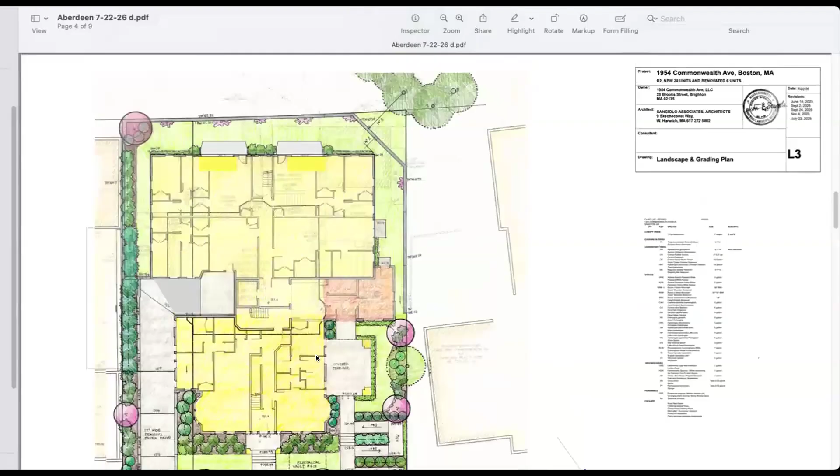Can you show the existing wall in that one before? She said you didn't notate it. It's not noted on this, but we think we have it on the elevation. No, you're correct, we don't have it notated. We should note it.

This is just a side remark - it says on the plan that you have an electrical vault there. Is it underground? Yes.

I'm just hoping that you will have enough room left to plant substantial trees in this front yard despite this electrical vault. I very much hope and expect that you will retain the stone wall, as the commissioners are saying. But in that case, you may not have room for the stone wall, a hedge, and a tree, plus the electrical vault. It's actually like a ground cover behind the wall, so it's not a hedge, it's not lawn, but it would be something low growing, so hopefully we can get the trees in there.

All right, Nick, can we move to the main picture that shows the beautiful design - that is just really something that I deeply appreciate.

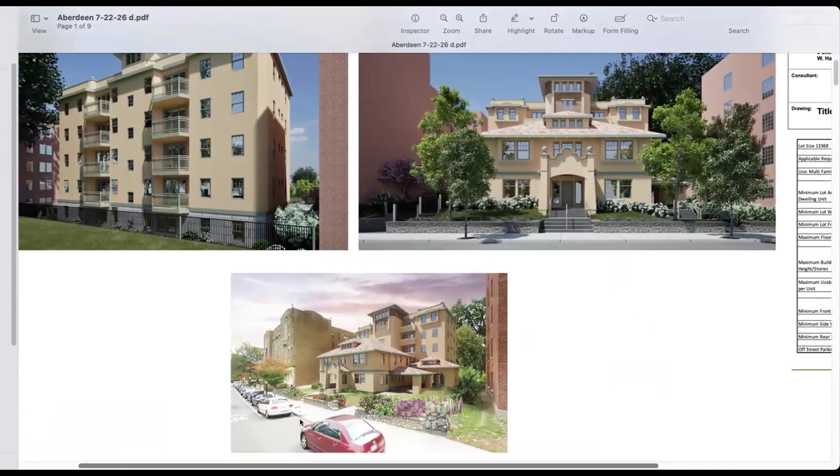You know me as someone who is rather harsh on developers and architects, and I'll show you that I have another side, because I think we are very lucky to have an architect who actually has a vision that doesn't want to ruin this site with some boxy, atrocious structure. I trust, having heard Mark's responses and his mention of the need for delight and playful elements, I can relate to it so much, because I think we don't have any memorable, beautiful elements that people really need in their lives.

So I would be heartbroken if any of you made Mark remove those spheres and change the top roof to just a flat roof, because it is that little parapet on top of the new building with those balls and the half-round recessed shape that makes this work. I also love the ceramic panel in the middle of that tower, and I really wouldn't change anything. I had my heart set on those canted corners, but it's not as important as keeping this as proposed, because we have to trust an architect who has proposed elements that will cost the developer more money.

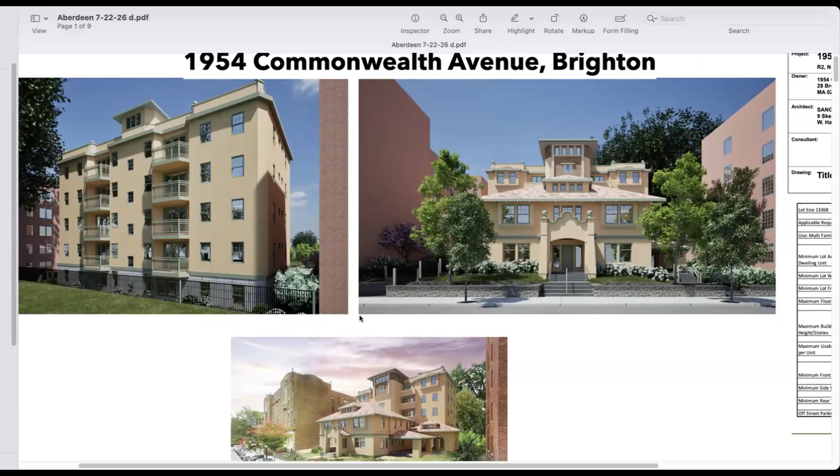So the doors will be replicated, in other words. And I sort of want to know, like, where the entrance to the new building connects—I can't quite picture it, it's hard to see in the rendering. It actually worked out fairly well. There was some resistance in whether we wanted to use it, but everyone said we had to do it, so we did it.

So what's going to happen is the entryway, the porte cochere, the main entry to the building, will be through doors that are replicated from the garage doors. It enters into a lobby with a meeting room, and from there up the stairs or elevator. So will an actual portion of the original garage be part of that entrance?

No, but it'll have the same proportion and the same materials as the existing garage. So nothing of the actual original garage is being saved? It's not restoring, but we want to save the rafter tails. But the doors are not being restored, the doors are being replicated.

The doors are being replicated. The material will be wood. I don't think they have a glass panel, no glass, they'll be wood. Yeah, they don't have any glass, they're just arched.

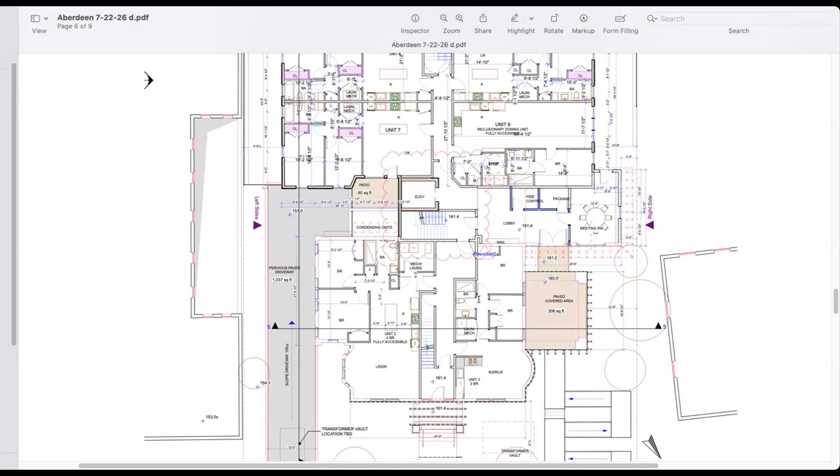It'd be nice to have a glass portion to it, but we're gonna do a blow-up of the door as part of the construction drawings, and they'll be reviewed by the BPDA and approved or whatever.

Would you object to a part of the door being glass? I think they just should be what they are, how they are. I don't like it. I guess I want to hear what the other commissioner would think of that.

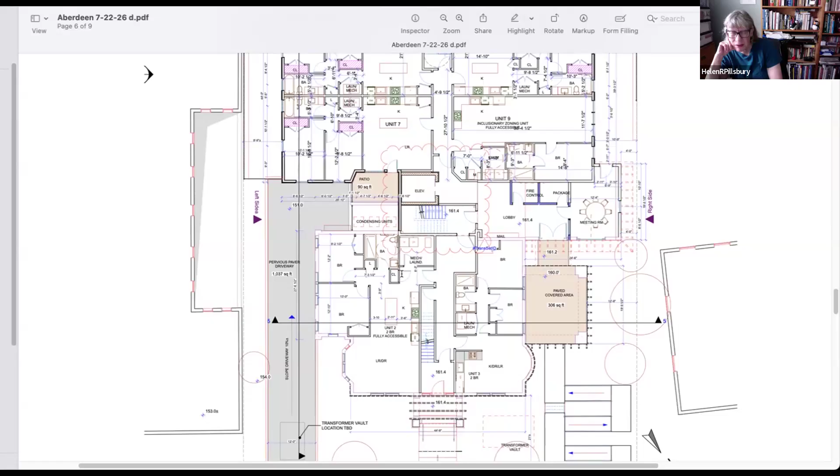That's a broad question. I would like to play it safe and say let's have the garage doors as close as possible to the original appearance. We should be preserving them as much as possible, even if it's not the original, then a replication of the original. There's enough else going on, I don't think we need to introduce yet another pane of glass.

I hate to be the person going on record as hating delight, but if everyone else agrees that the roof is fine the way it is... normally when we do these sort of additions they're not as ornate, and I know it's a special situation because the house being moved is a little bit more ornate. Everyone else is fine with the spheres on the roof, and I'm along the lines of it meshing with the rest of the buildings, and also making it stand out from the existing structure.

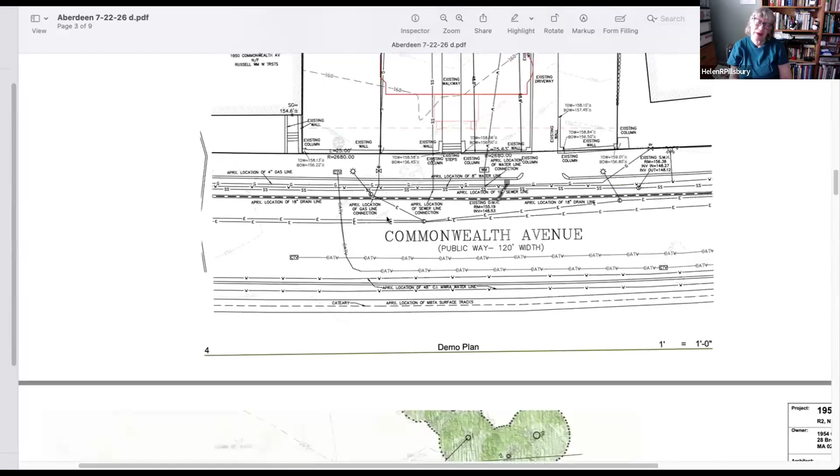There's this balance of nodding to the original architecture without exactly copying it. We're talking about replicating the doors because that's part of the original architecture, but for the new building itself, you're looking at nodding to it and being reminiscent of it without exactly copying it. I think it's difficult because if you make the addition too plain, it doesn't look right, and if you make it too ornate, it doesn't look right either. It's a hard question, I could go either way. It's a Goldilocks thing, there's a lot going on up there.

Well, I think it's time that we entertain a motion. Considering how much area we've covered and gotten into the details of this, I'll take a stab at making the motion that we approve it with a list of provisos.

Sharon, do you want to see if it seems like Helen, in terms of the provisos? Yes, actually help with the provisos would be very good. Could I add one with the moving, as far as the shoring and the moving plan? Could we make the approval contingent on that?

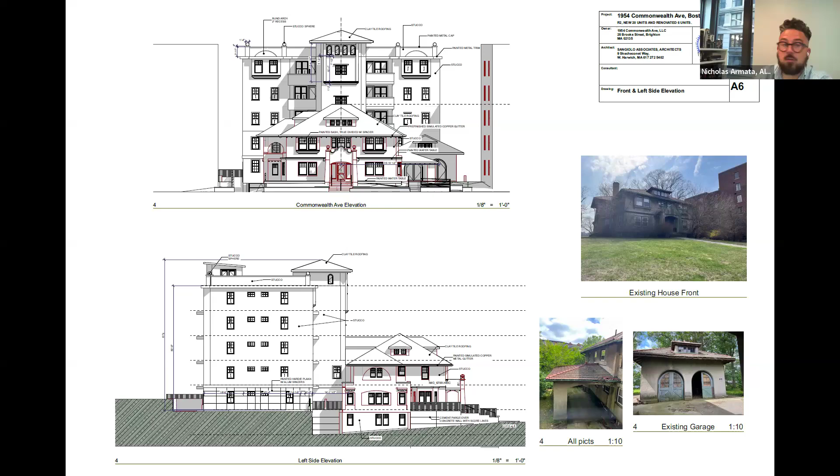Actually, there are so many things. Do you mind just reading that, reciting that back to us? Let me just get to this to refresh my memory.

The motion was to approve with the understanding that the house will be moved forward and the existing design will be maintained. If anything is deteriorated, it'll be reconstructed. If anything has to be removed, it'll be reconstructed in kind. In terms of the roof, the decorative spheres, after the tiles are removed from the front stairwell area, I should say stair tower, it will be determined by staff if it's appropriate to keep them or not. The front balconies will remain.

The front porte cochere, there will be an attempt to salvage it. However, if it cannot be salvaged, the applicant will report back to staff for final approval. The garage doors will be either restored or rebuilt in kind.

There will be shade trees planted in the front, and evergreen plants planted along the switchback, and I believe that's it. Did you say the retaining wall? Oh, and the retaining wall will be reconstructed with the existing materials and mortar, and the retaining wall leading down to the garage will be constructed in a similar design as the existing retaining wall.

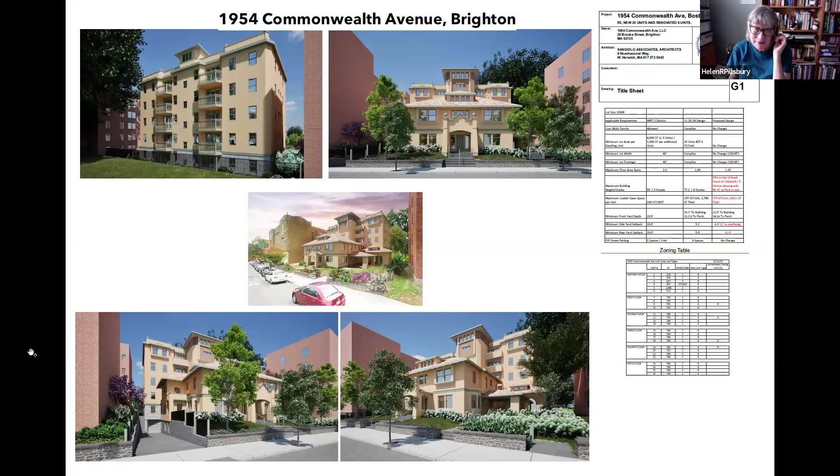So the rest of us, shall we vote? Yes. Aye. Okay, great, Ed? Yes, aye. And me, yes, aye. Terrific, great.

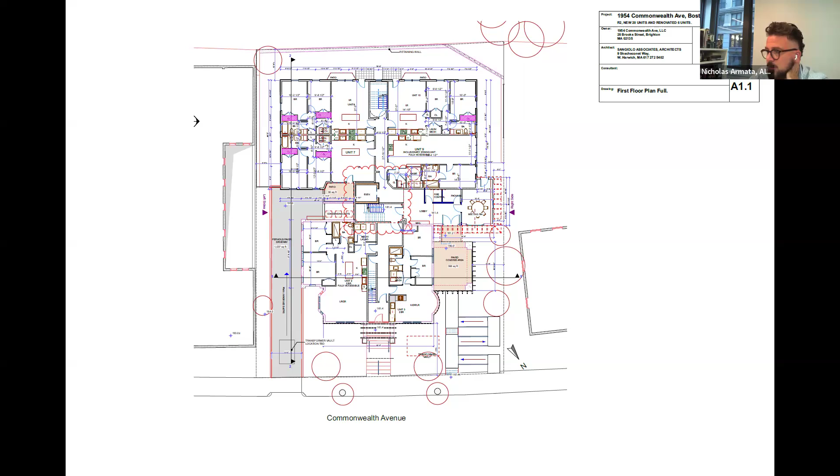Mark, Susan, thanks for your hard work. I will get you your approval letter out into the mail or out to you tomorrow, and we can discuss any questions you might have at that time. Thanks for coming by, and thanks for the design.

Next up we have administrative review. We have one administrative item. Sorry about that. Well, we still have the three of us, so I'll talk real fast.

27.0037, 4 Chiswick Road. Replace two windows in unit with 6/1 wood windows, no low-E glass, and simulated divided lights on the interior and exterior of the windows.

It appears to comply with regulations. Am I missing anything? No, that address has been working through their windows. I think we've seen them before, so I think they have a standard plan. Yeah, I think they do.

Vote to approve as submitted. I'll second that. Okay, all in favor? Aye.

And the last order of business before Nick turns into a pumpkin. Yeah, so annual vote for chair and vice chair. Sharon has nominated herself as chair and Ed has nominated himself for vice chair.